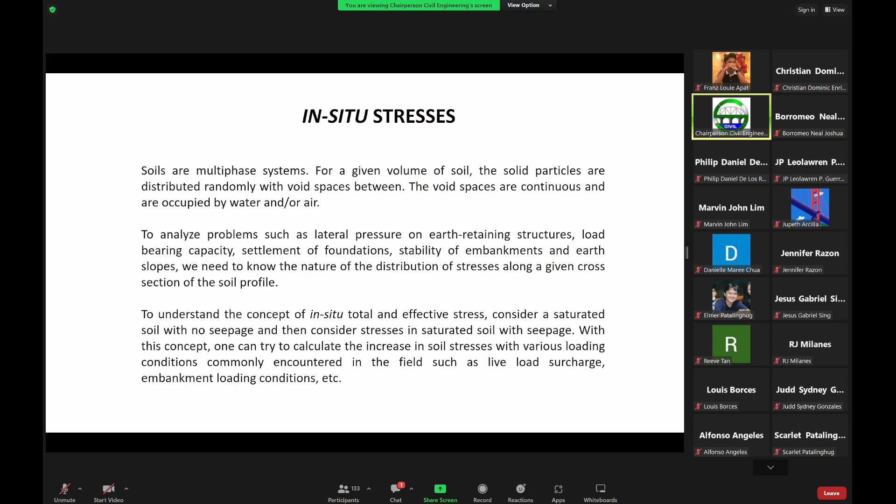So we have here a figure. If you have your book with you, it's just the same figure, I just copied it here in the slide. But if you have your book, you can also look at your book. I hope it's still the same figure number, that's figure 9.1 in your book.

So here in figure A, this one here, we try to consider the effective stress consideration for a saturated soil. Take note that it's a saturated soil, that means it's fully occupied by water in all the voids. But in this case there is no seepage.

So here you can see in figure A, you have here the solid particles, and then you have here the voids with some water on top at a height of h. And then the voids here are all occupied by water, so that means we have pore water, the pores are all occupied by water. And then you have the solid particles.

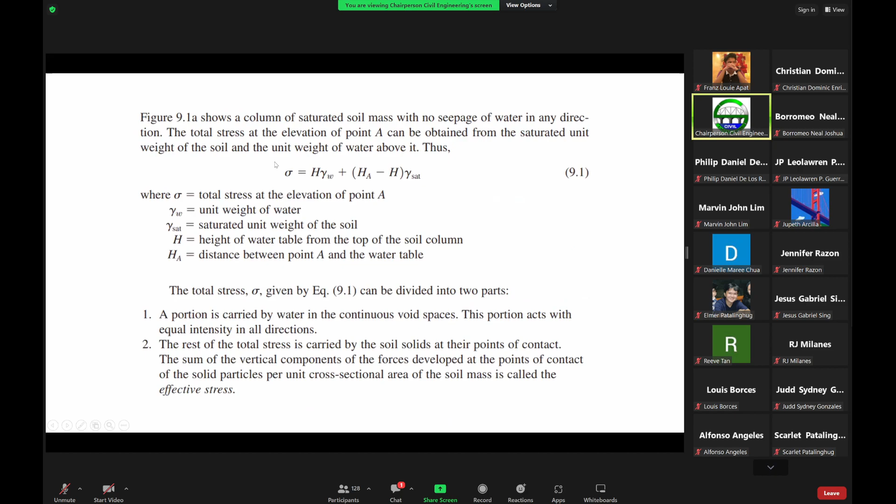Now with this equation, if we try to substitute this for the total stress into equation 9.4, so this is now your total stress, and then to get the effective stress, we subtract the pore water pressure from the total stress.

So this is the total stress taken from this equation, minus the pore water pressure at point A, although it can be any point. Again, the pore water pressure is defined as the height of point A from the reference water level, multiplied by the unit weight of water.

So again, please try not to be confused. This unit weight of water multiplied by H, where H is needed for the determination of the total stress, while this term, if you multiply the height H sub A by the unit weight of water, that gives you the pore water pressure. Please try not to be confused.

Then this difference between the saturated unit weight and the unit weight of water can be replaced by gamma prime, where gamma prime equals the saturated unit weight minus the unit weight of water. That is now defined as the submerged unit weight of the soil, or sometimes called the buoyant unit weight of the soil.

So in this formula, we can see that the effective stress at point A is independent of the height of the water column. So whether the height is 1 meter, 2 meters, or 3 meters, the effective stress at point A is just the same.

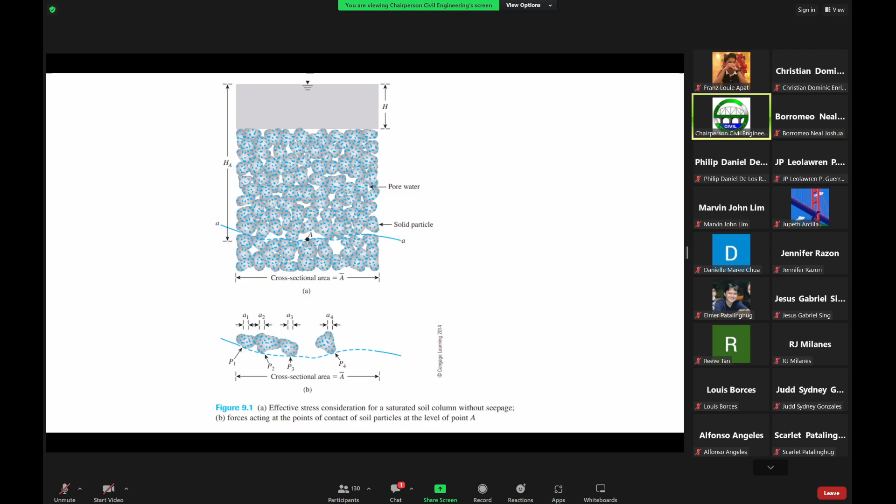So to summarize, the effective stress is approximately the force per unit area carried by the soil skeleton.

The particle to particle contact is what you call the soil skeleton. Now, this effective stress, which we just defined, in soil mass actually controls the volume change in soils as well as the shear strength in soils. So later on we will be discussing shear strength. After this, we'll discuss settlements, then shear strength of the soil, and then for our last topic, the lateral earth pressure.

Now, increasing the effective stress induces a soil to move into a denser state of packing. For soil materials, we have a dense state, very compacted, and also a loose state. For example, when doing backfilling works, you dump the material to be compacted. Before it is compacted, it's still considered a loose state, and after you compact it, it's now in a dense state. So the denser the soil material is, the higher the effective stress.

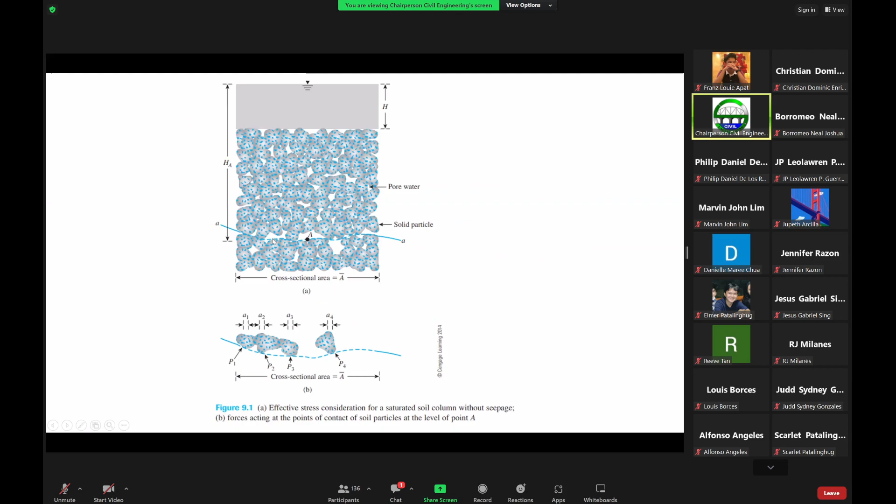There's a note here on the equation for effective stress: effective stress is defined as the sum of the vertical components of all intergranular contact forces. So that's this one here, the sum of the intergranular forces, the sum of all the vertical components of the intergranular contact forces over a unit gross cross-sectional area.

By this definition, it is mostly true for granular soils. But in the case of fine grain soils, intergranular contact may not physically be there, because for fine grain soils, especially clay particles, these are surrounded by a tightly held water film. If you recall when we were discussing clays, we have the diffuse double layer.

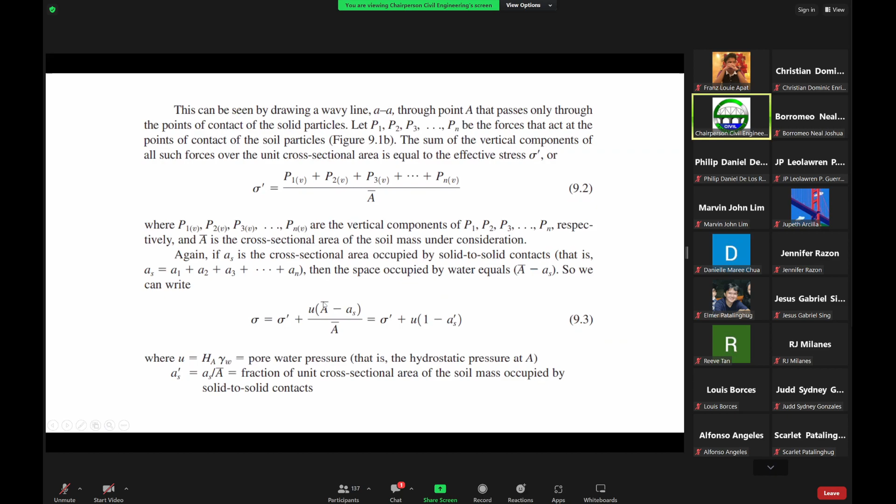In a more general sense, equation 9.3 can be rewritten as follows. If you recall, that's basically the effective stress, sigma prime, which can be replaced by sigma sub Ig, where this is now the intergranular stress, plus a term we defined earlier: minus A prime plus R prime, where A prime is the electrical attractive force per unit cross-sectional area of the soil, and R prime is the electrical repulsive force per unit cross-sectional area of the soil.

In the case of granular soils such as sands and gravels, as well as silts and clays of low plasticity, these two magnitudes are quite small. Hence, for all practical purposes, the intergranular stress is just the same as the effective stress, which is approximately equal to the total stress minus the pore water pressure. However, if this term is quite large, the intergranular stress may no longer be the same as the effective stress. This situation can be encountered in highly plastic dispersed clay.

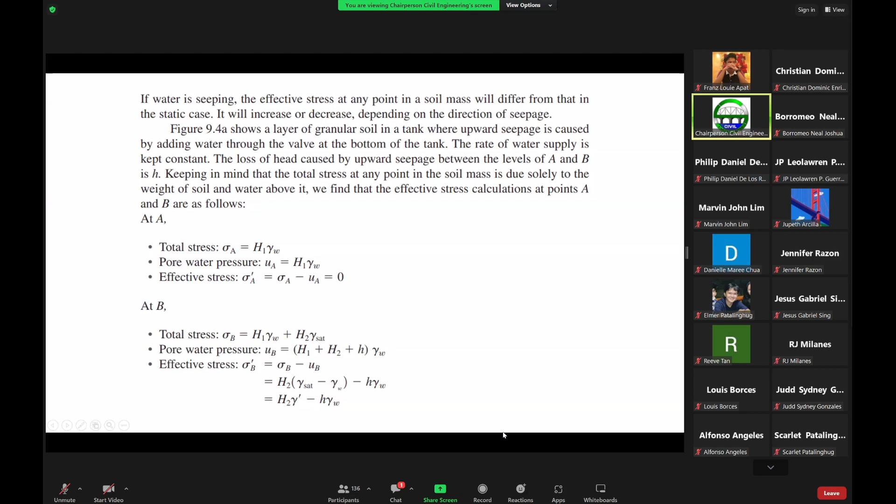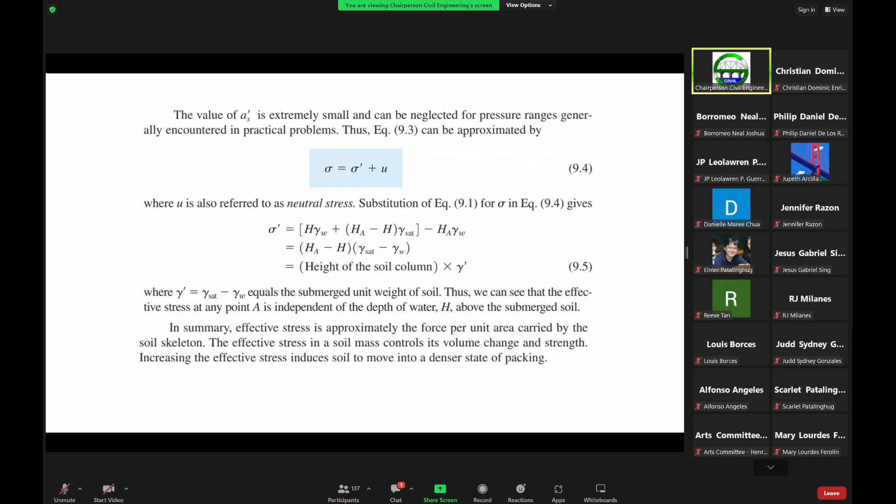So if we now try to compare figures 9.2D, where's that 9.2D? Yeah, this one. So if we now try to compare the effective stresses for the case of soil with no seepage, then compare that with this one here, with this effective stress where you now have seepage.

Then it would show that the effective stress at a point located at a depth z, where's the depth z, this one here, at depth z, that's point C. So if we now try to compare the two, then we can see that the effective stress is being reduced by this amount here: i times z times the unit weight of water.

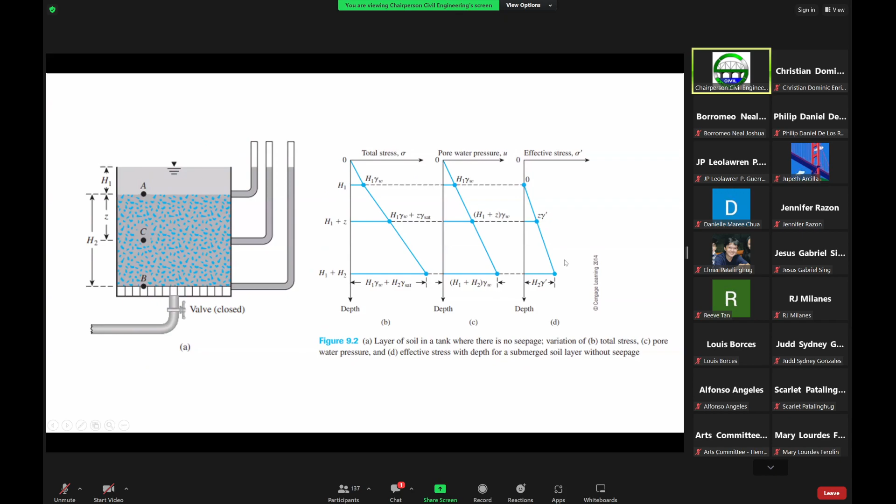Okay, so let's see if that's correct. So comparing this one, yes. So that's being reduced by this term, and that is due to the upward seepage of the water. Because of the upward seepage, the effective stress is being reduced by this amount here, which is I times Z times the unit weight of water, where I is the hydraulic gradient.

Now, if the rate of seepage increases, thereby increasing the hydraulic gradient, a limiting condition will be reached such that the effective stress will now be equal to zero. In that case, the hydraulic gradient will now be considered as the critical hydraulic gradient for zero effective stress.

If you now have zero effective stress, then there can be ground failures. So this term here will now be considered as your critical hydraulic gradient. In such zero effective stress conditions, the soil stability can be lost.

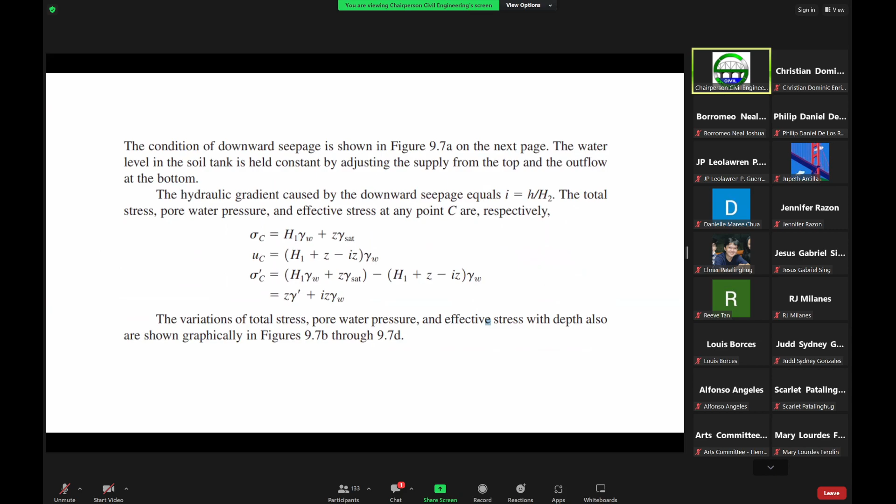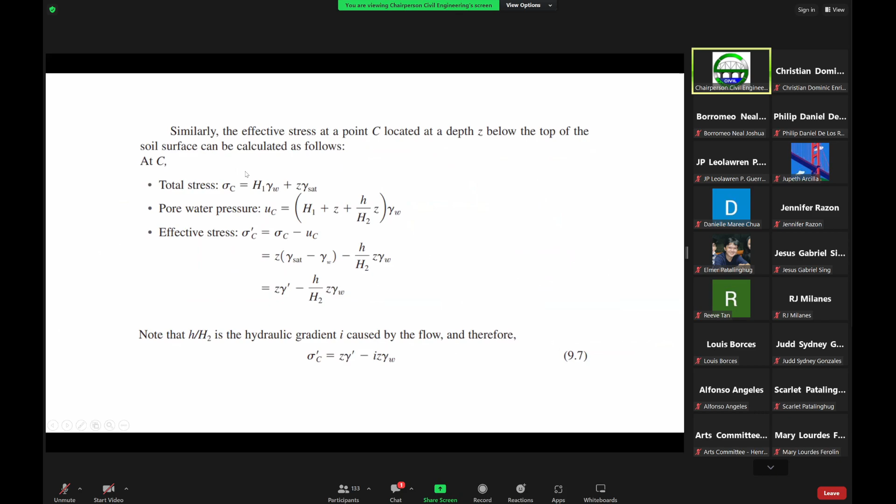At point B, the total stress is basically the same for the other conditions. But for the pore water pressure, notice we add H, because that is H sub 1 plus H sub 2 plus small h, multiplied by the unit weight of water, giving you the pore water pressure. But in the downward direction, you now have H sub 1 plus H sub 2 minus small h, giving you the depth until point B to get the pore water pressure. Subtracting the pore water pressure from the total stress gives this term here.

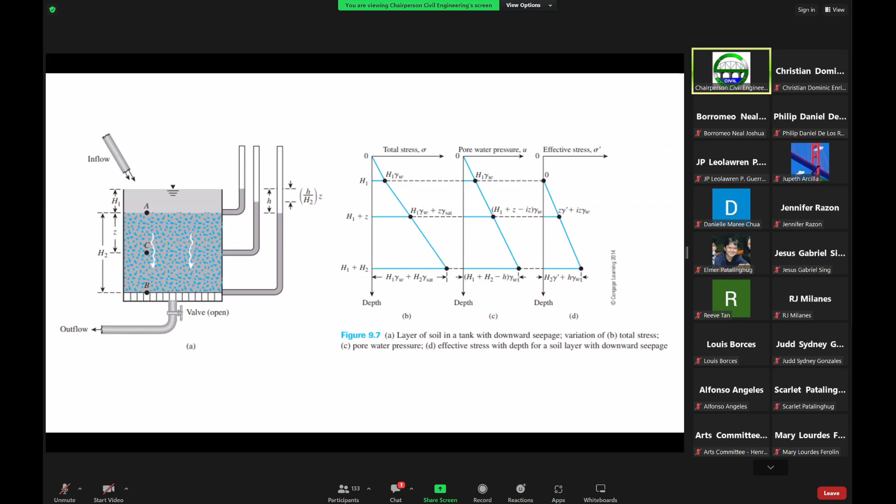So far we have seen the effect of seepage on the stresses, as well as the pore water pressure, which can either increase or decrease the effective stress at a point in a layer of soil.

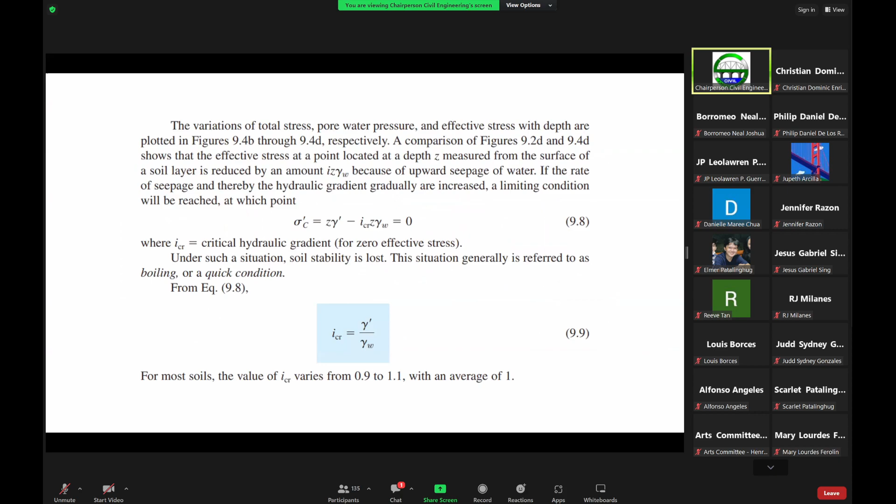Now let us try to express the seepage force per unit volume. Earlier we saw a figure with no seepage, from which we can see that the effective stress at a depth Z measured from the surface of the soil layer in the tank can be given by Z times gamma prime, where gamma prime is called the submerged unit weight, the difference between the saturated unit weight and the unit weight of water. That's your submerged unit weight.

So that means the effective force on an area can be equal to the effective stress multiplied by the area. Effective stress is a unit of pressure, force over area, multiplied by area gives you an effective force.

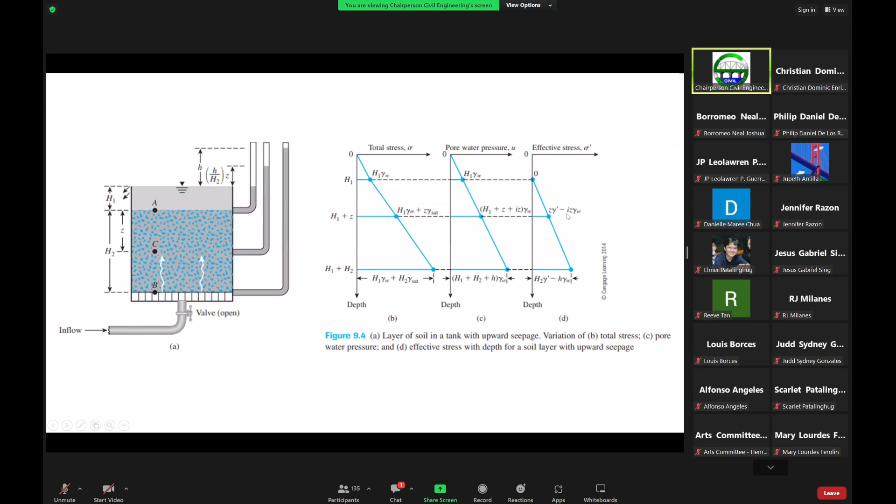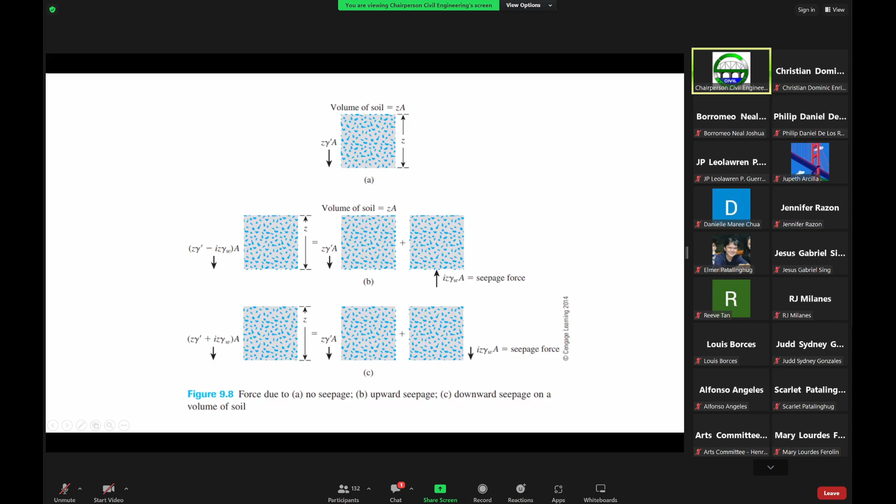So we can see that upward direction here, this is the seepage force in the upward direction. Well, this is the seepage force in the downward direction. So that means the seepage force per unit volume, either in the upward or downward direction, is just the same. That's the hydraulic gradient multiplied by the unit weight of water.

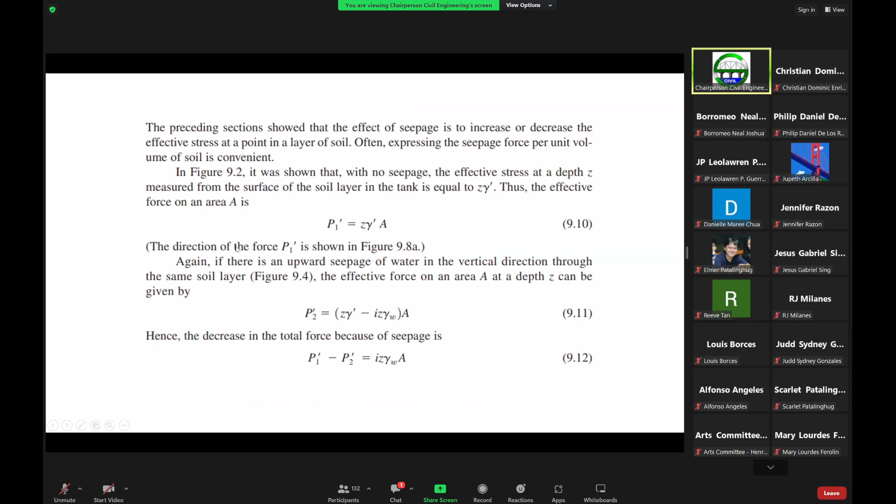Take note here, this is a consideration of a saturated soil sample, but in unsaturated soil mechanics, since it is not fully saturated, the degree of saturation is not 100%. So then we can multiply this by the specific degree of saturation.

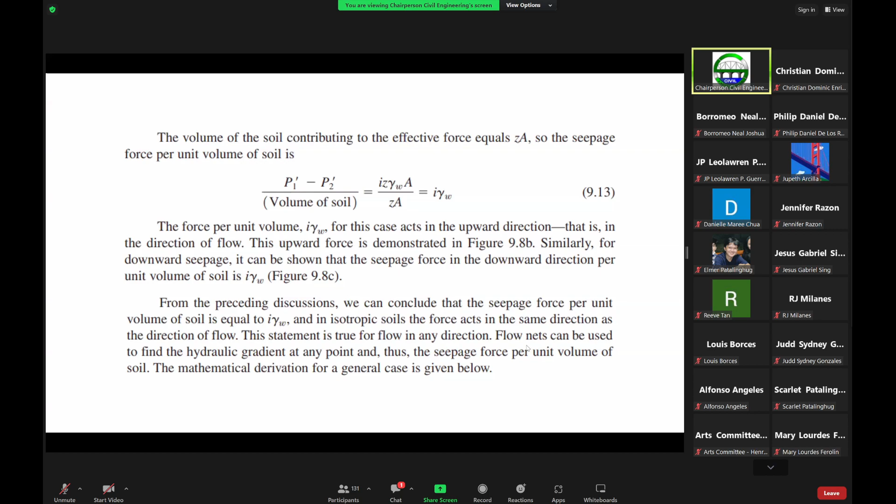So then we can conclude that the seepage force per unit volume is equal to the hydraulic gradient multiplied by the unit weight of water. And then in isotropic soils, the force can act in the same direction.

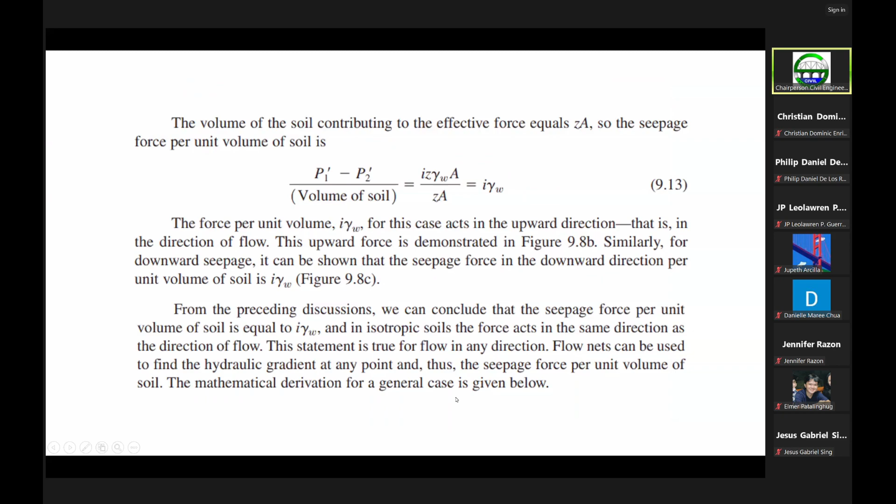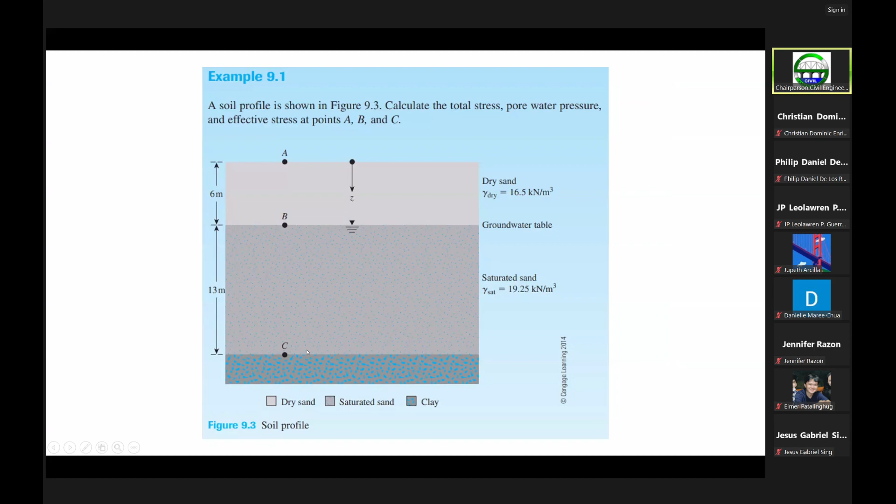That means the increase in water level is now somewhere here. So the groundwater level should increase by about 4.5 meters, leaving only 1.5 meters, such that the effective stress at point C will decrease from 221 to 190 kilonewtons per square meter. So that means the higher the groundwater level, the smaller the effective stress.

Now, by the way, for clays, depending on its consistency, it can be soft, very soft, medium stiff, stiff, very stiff, or hard clay. In the field, normally we determine that by doing an SPT, standard penetration test, getting the N value.

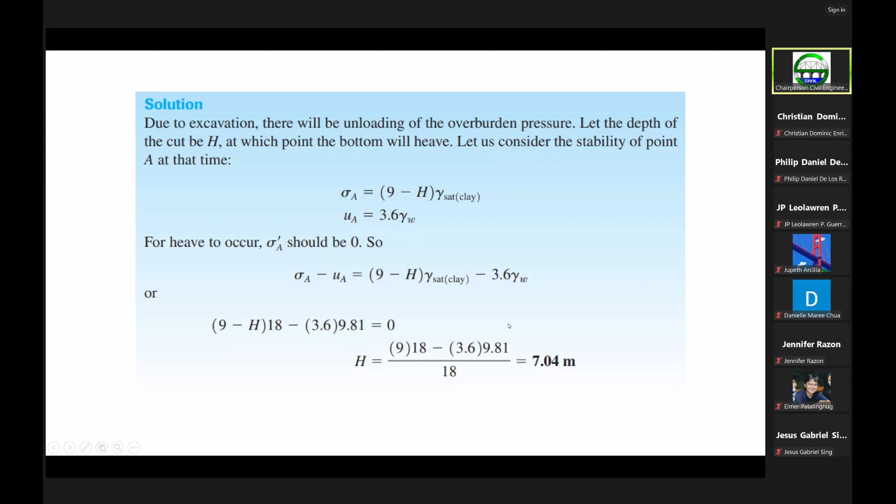So that means I can still cut here a maximum of approximately 7 meters, leaving about 2 meters, in order for the clay to maintain its stability.

So 7 meters is still quite deep. In actual construction, we still put some shoring. Irregardless of whether the effective stress is zero, automatically for safety purposes in construction, beyond around 1.5 meter depth, we already try to put some shoring protections on the walls. We cannot take such risk.

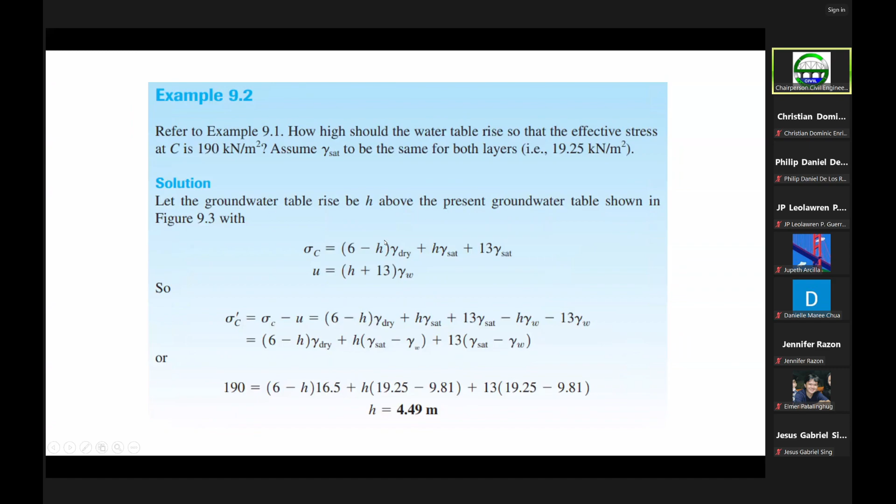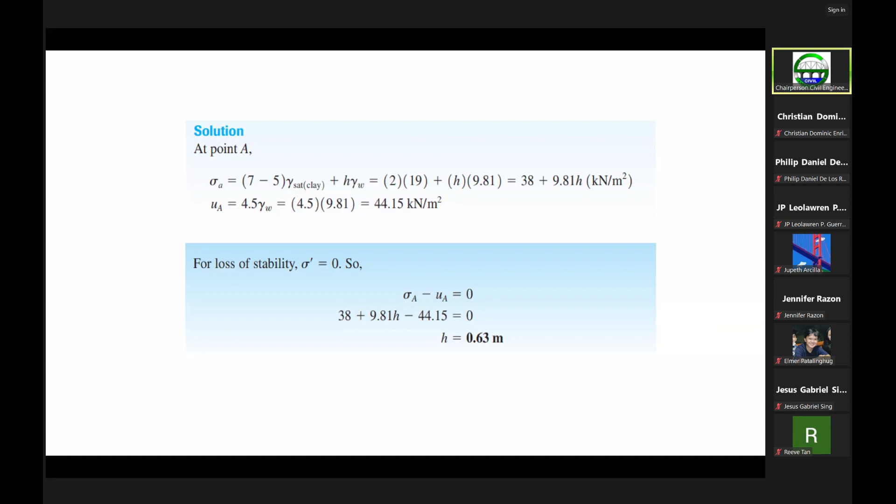So that means you can only have a height as high as 0.6 meters out of the total depth of 5 meters. If you pour water such that the level is higher than 0.6 meters, the stability in the clay can be lost and failures can occur. You can imagine if you have a 5 meter depth, with people working there around 1.8 meters tall, and you put water above 0.6 meters, it may not be good for safety.

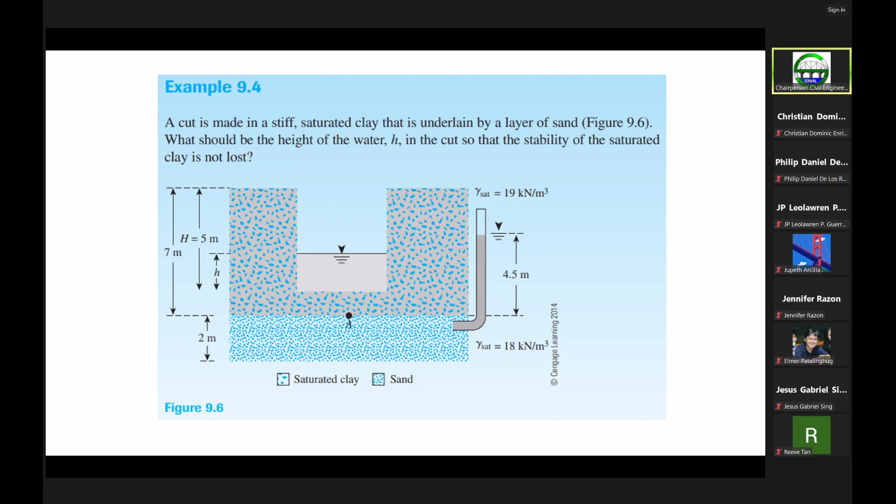Okay, so I think this will be our last example. Yeah, okay, so our last example.

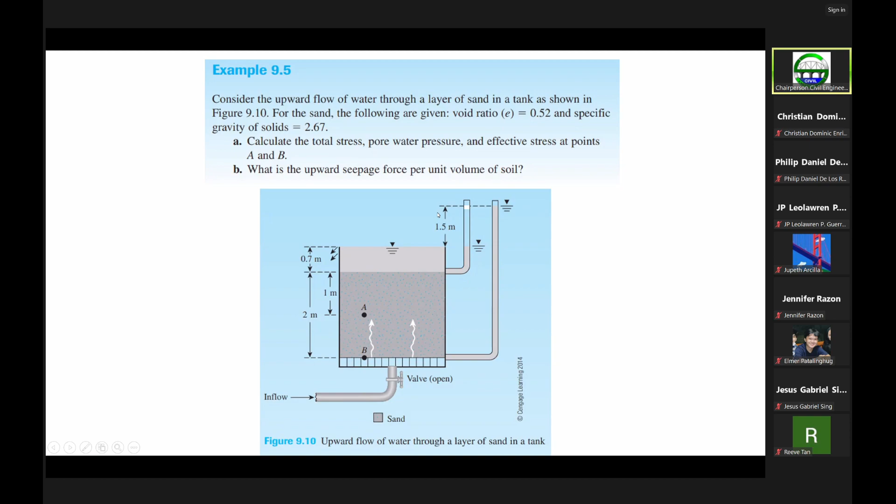So in this case, if this is the flow of water, the length of flow is 2 meters, and the pressure head is 1.5 meters. So the hydraulic gradient is now 1.5 over 2, which gives me 0.75.

So I just substituted the hydraulic gradient into the formula for the seepage force per unit volume, which gives me about 7.36 kilonewtons per cubic meter. This is the upward seepage force, because here the direction is upward, but if the direction is downward, then this would be the downward seepage force per unit volume. So if you want to get the seepage force, just multiply this amount by the volume of the soil.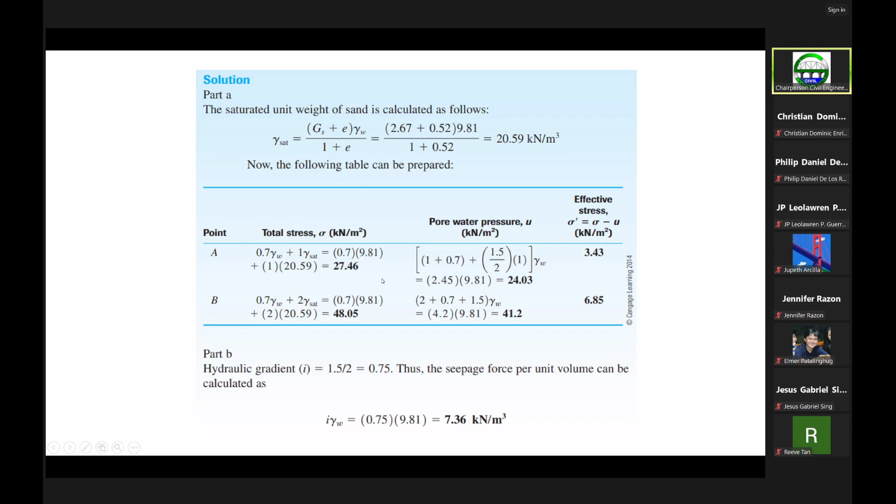Okay, I think that's the last slide. Are there any questions or clarifications so far? Let me just stop sharing.

Okay, so I hope I am clear with everyone. Again, I'm trying to be as slow as I can, so as not to confuse you with the terms between the total stress and the effective stress.